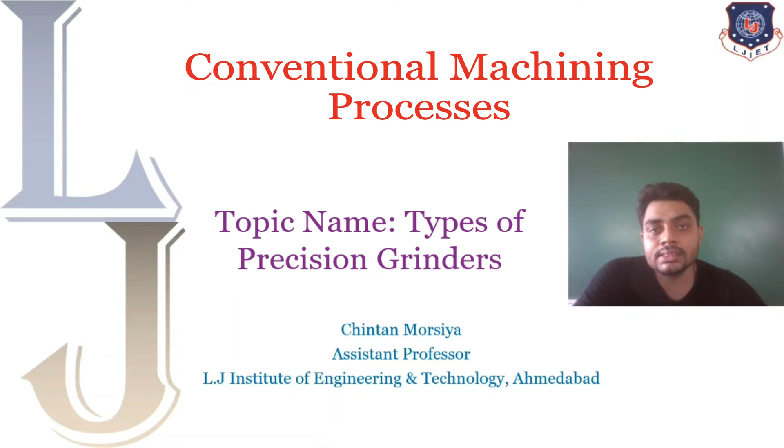Hello students, today in this lecture we will discuss different types of precision grinder machines. As in the previous lecture we discussed different types of rough grinder machines and where these grinder machines are used, let us continue our topic with precision grinder machines.

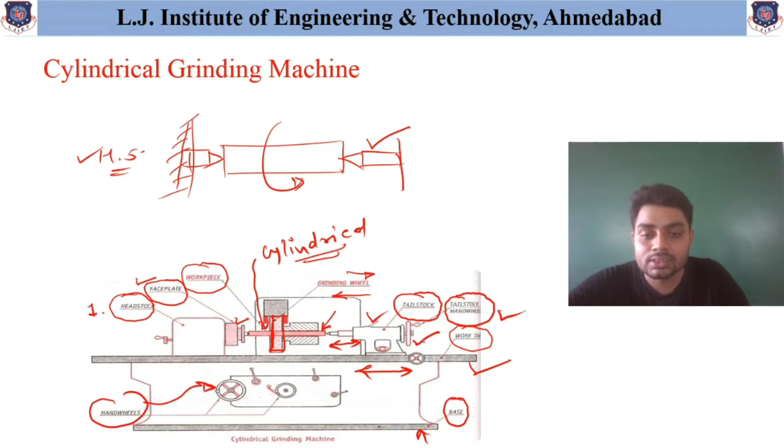The next important part is the work table, which is helpful for holding the guideways, the headstock, and the tailstock available here. So this is our basic first discussion about these cylindrical grinding machines.

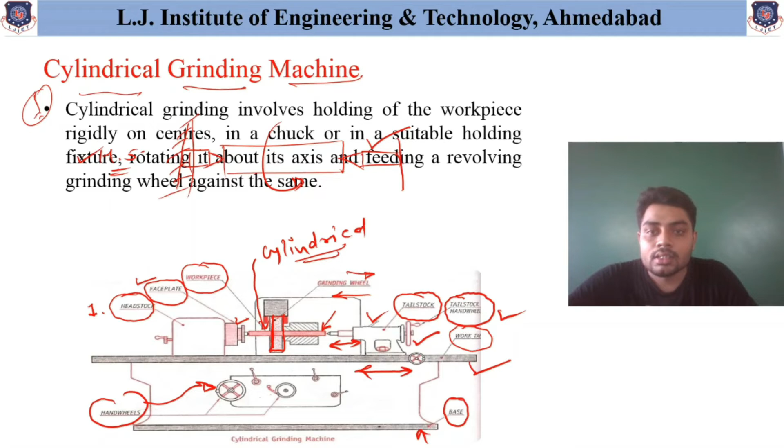Now, as you can see, we have summarized the basic discussion here. Cylindrical grinding involves holding the workpiece rigidly on the centers we discussed, or held rigidly in a chuck or suitable work holding fixture, and then it rotates about its axis.

When the workpiece is fixed, the grinding wheel is fed towards the workpiece, and the workpiece is given movement in the forward or backward direction, and this is how the entire cylindrical job can be machined easily. The entire surface or periphery of the cylindrical component can be done easily using this cylindrical grinding machine. This process is helpful when the workpiece length is longer.

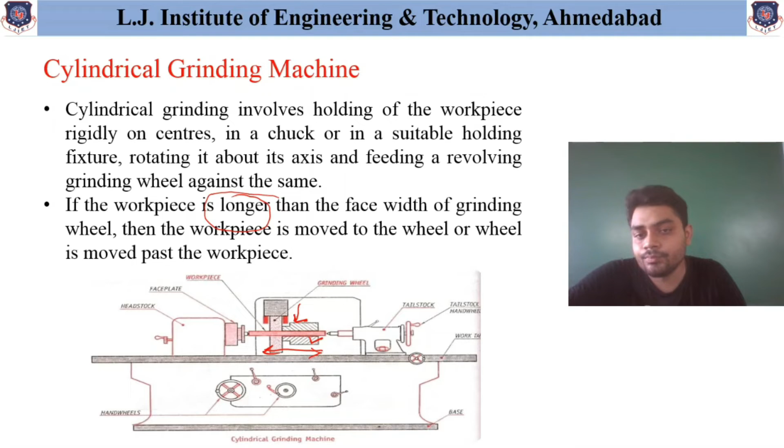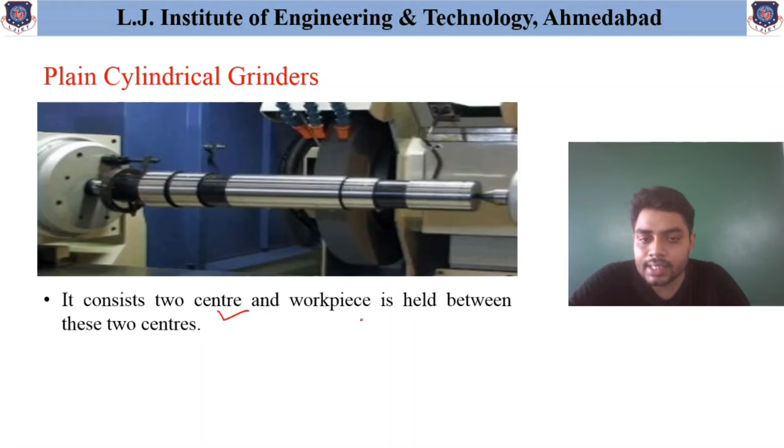Some operations are similar to those of cylindrical grinding machines. Similarly, it consists of two centers, and the workpiece is held between these two centers. During operation, this rotating workpiece is moved across the face of the grinding wheel, based on where the machining is required, because the position of the grinding wheel is fixed.

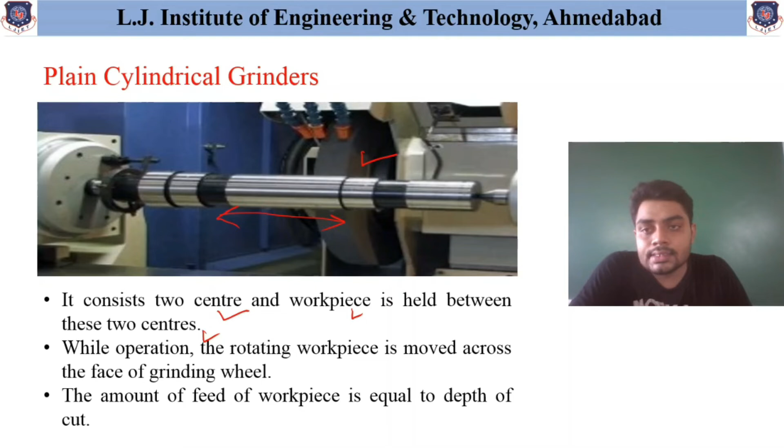That's why this cylindrical component needs to be moved across the face of the grinding wheel. I hope it is clear how this cylindrical grinding machine operates, and the similarity between this machine and the plain cylindrical grinders. The amount of feed of the workpiece is always equal to the depth of cut. Now we will discuss the next machine, the universal cylindrical grinder machine.

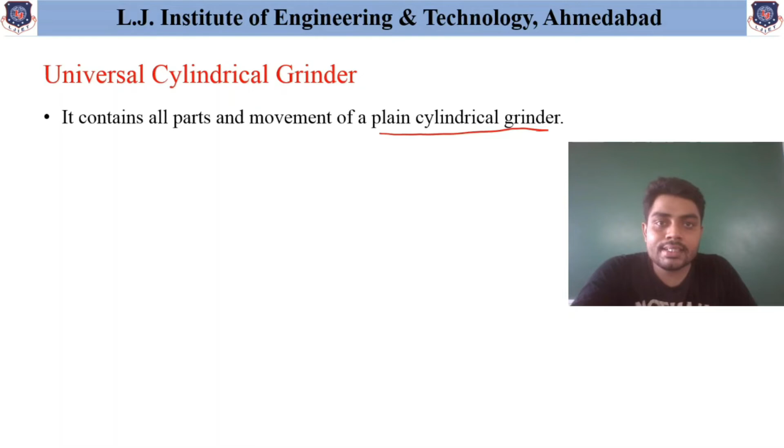As we have seen in the plain cylindrical grinding machine, this universal cylindrical grinder machine also consists of similar parts to that of the plain cylindrical grinding machine. So what is the major difference between the plain cylindrical grinding machine and the universal cylindrical grinding machine?

The main difference is that the headstock can be swiveled in the horizontal plane. In the plain cylindrical grinding machine, the headstock position is fixed and cannot be moved. But in the universal cylindrical grinding machine, the headstock can be swiveled easily about this horizontal plane, which is the extra movement obtained in this machine. Other than this, the operations performed and all the parts are similar to the plain cylindrical grinder machine.

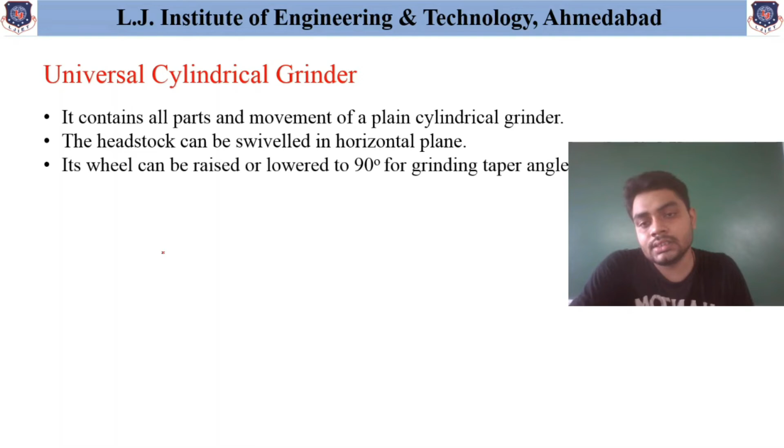As swiveling is possible about the horizontal plane, the wheel can be raised or lowered up to 90 degrees for grinding taper angles. So in the universal grinding machine, the grinding wheel can also be raised or lowered up to 90 degrees for generating any taper angles. This is the discussion about the universal cylindrical grinding machine.

So again, to repeat: this universal cylindrical grinder machine is similar to the plain cylindrical grinder machine. The major differences are, first, its headstock can be swiveled in the horizontal plane, and second, the grinding wheel can be raised or lowered up to 90 degrees to generate taper angles. This is the main difference.

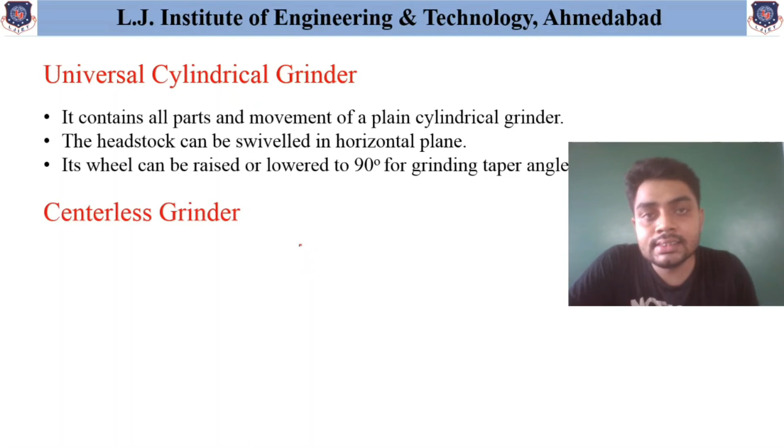Now, the next important machine is the centerless grinder machine. Let us have a look at the simple figure shown here. For any machining, if we want to machine this cylindrical workpiece, we must set up or provide a fixture for the finishing operation. But without providing any fixtures, arranging such that the component can be machined easily is the type of arrangement available in the centerless grinder machine.

In the first figure, this part is the workpiece we need to machine, and it is fixed between two rollers, the first being the grinding wheel shown here, and the second the regulating wheel, which helps hold the workpiece in between them. Support is provided to this workpiece from the downward direction, and this support is called the blade.

As you can see, when the grinding wheel rotates clockwise, the regulating wheel also rotates clockwise, but the workpiece in between rotates in the anti-clockwise direction, as shown. Let me show this in a cross-sectional view.

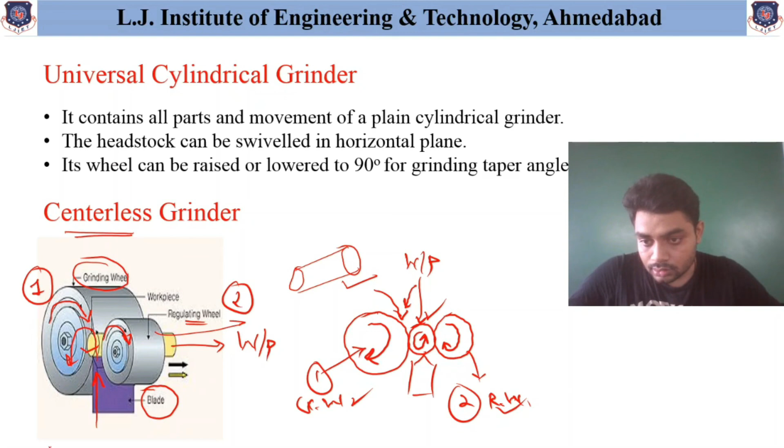This is a very efficient method to generate or finish cylindrical surfaces of any workpiece. You can see the basic working with this hollow cylindrical component shown here, and how it is fixed using the grinding wheel and the regulating wheel. By providing support from the bottom side in between them, the machining or finishing operation can be easily obtained.

So we have discussed different types of precision grinder machines used for finishing purposes only. There is also variation—we have discussed different rough grinder machines used for roughing purposes, and different precision grinder machines used for grinding or precision work only.